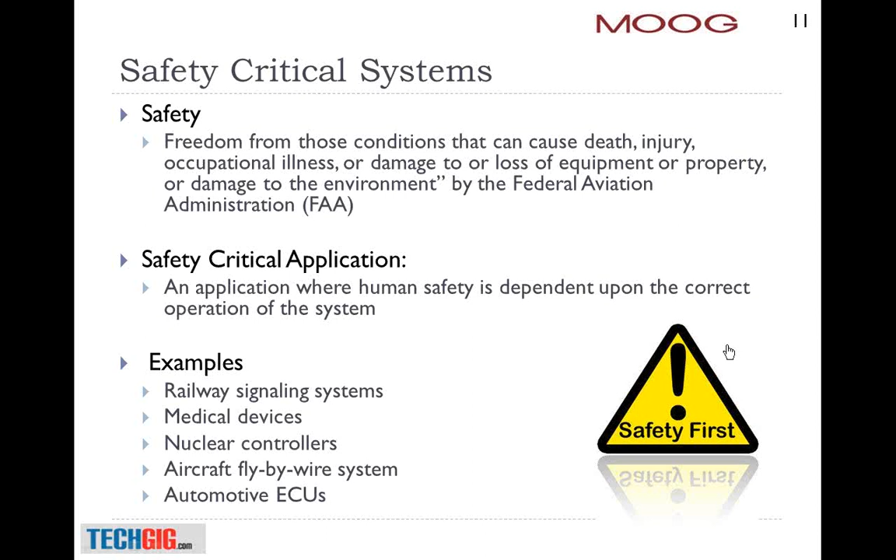So what you're seeing is a railway signaling system, just two people sitting there and controlling the complete railways. So this is driven by software, and it is a safety critical thing. The computer is trying to manage the tracks, and accidents have happened in this. This is something which is there inside the heart. Instead of the heart you have a small artificial pump which has software driving it. So this is the medical field.

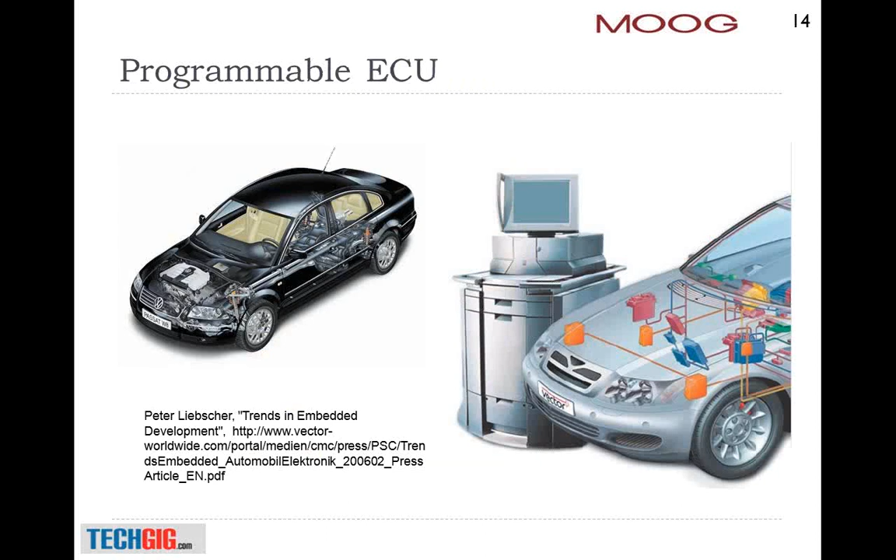Then you have the programmable ECUs. So your family is traveling in a car, completely dependent upon the software that is running the show. And then finally you have the fly-by-wire control systems, where again it could be someone very close to you who is flying in these things, and the software is driving this. The software makes it fly for 16 to 20 hours. You go from India to US, the whole journey is done by these fly-by-wire control systems.

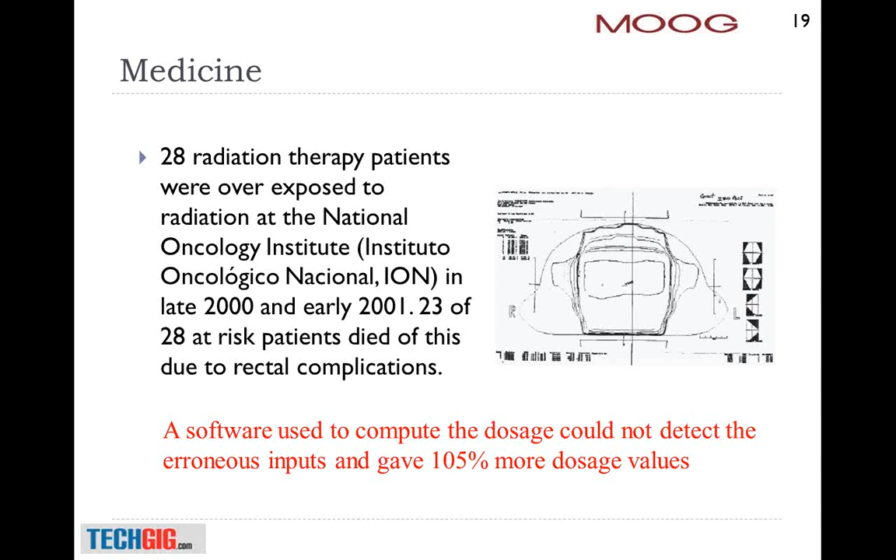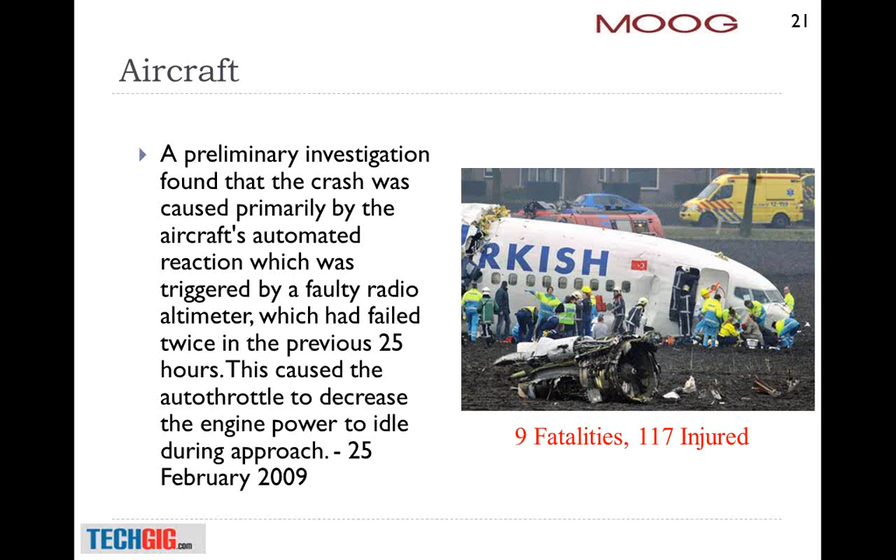And then the favorite thing for me, the aircraft field, where crashes have happened because of software failure. And all these things are pretty new. In hindsight, when we look at all these accidents, if we had done some extensive testing, perhaps we could have avoided this. So we require all our wits and ingenuity to make a safety critical system work. Outthinking nature is an overwhelming task. So this is what drives the safety critical business today.

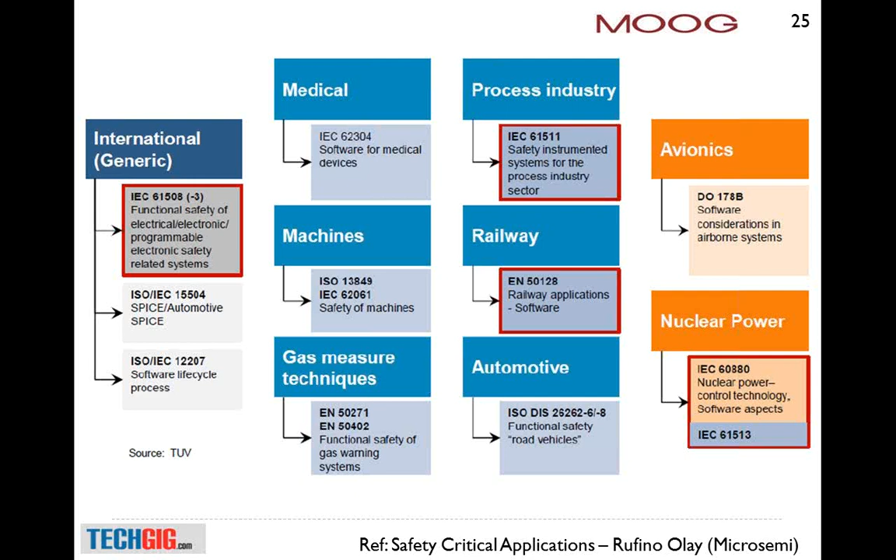So what do we have for this? We have standards. We require standards to develop a safety critical product. And what are the different standards available? You have got standards in all the domains. So you have the medical field with the 62304, the automotive domain with the 26262, the railways with the 50128, and the avionics with the DO-178B. So you have all the standards in place. So we have done a good job there.

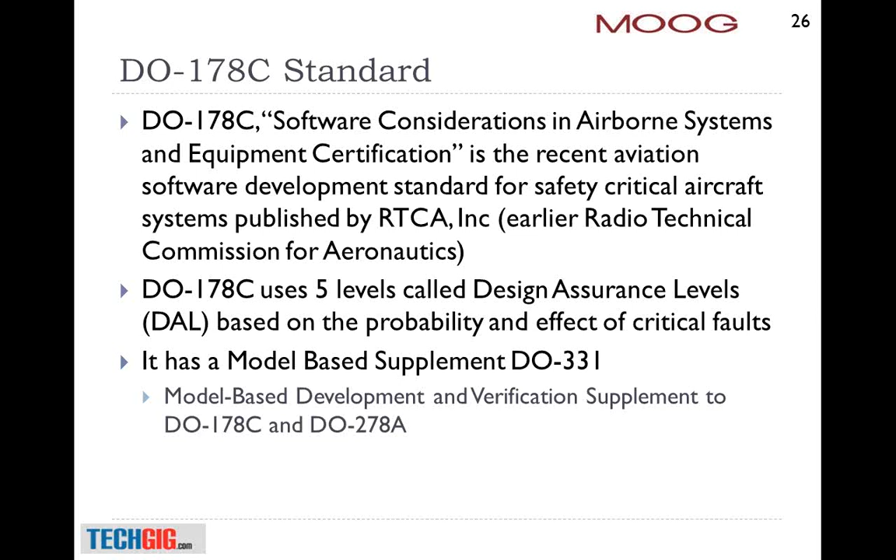The DO-178C standard, because I'm coming from an aerospace background, is our Bible which we read every day, sort of. This standard tells you that there are 5 basic levels of criticality, and how we have to test based on the criticality. And recently, the new standard DO-178C has a model-based supplement which talks about how you do testing and how you develop a system if you have requirements given as models. So this standard has realized that going forward, model-based is the way to do things.

So remember that there is a big difference between safety and reliability. A highly reliable boiler which can withstand 2 times the pressure may explode with twice the force in an unsafe condition. So you have to remember this specific aspect. Safety is different, reliability is entirely different.

The software will perform very well as it has been designed and tested for this. It will very faithfully carry out the function defined by the requirement. So we have to ensure that the requirement is safe under all conditions. So requirement is what drives your safety.

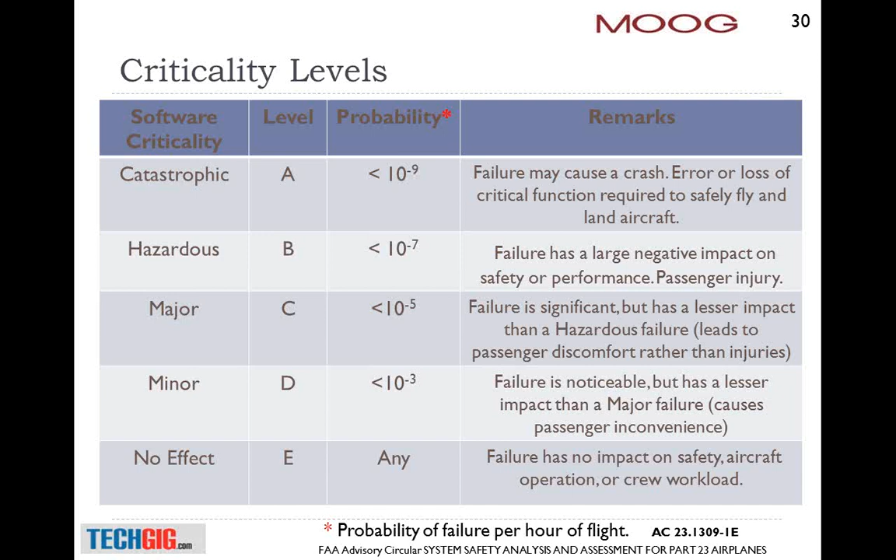These are basically the criticality levels in the DO-178C. So you have the software criticality, catastrophic; these are talking about the accidents. And what should be the probability of failure? So 10 power minus 9 failures in 1 hour of operation is a software with catastrophic criticality. So this is what should happen. And 10 power minus 9 is a very small number in 1 hour of your flight or 1 hour of operation. And that is designated as level A for DO-178C.

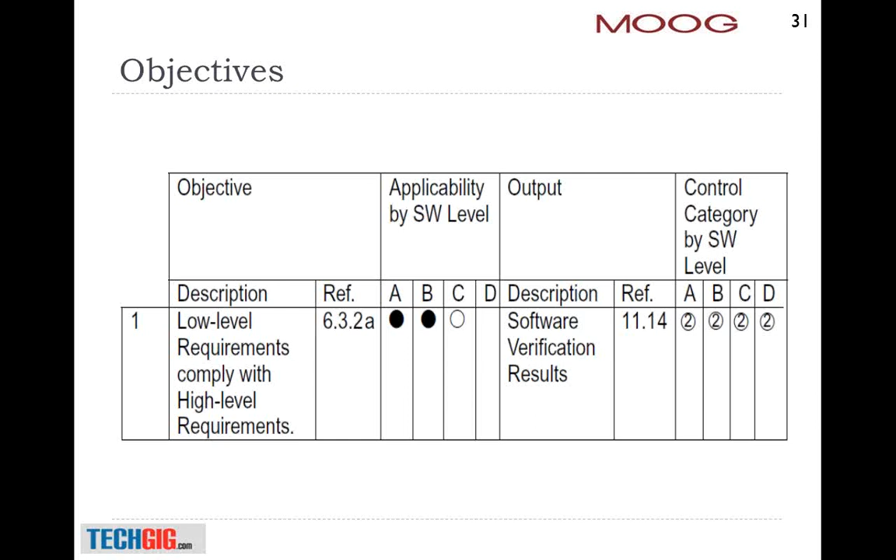And 178C lays down certain objectives. So it says that you have to fulfill these objectives to come up with a better system. So one of the objectives could be low-level requirements have to comply with high-level requirements. So there are a set of objectives categorized over the different life cycle phases. So you have planning, you have development, verification. If you see here, planning and development have 7 each, whereas verification has 43 for level A in DO-178C. And there is something called independence there.

If you see, for level A, 25 objectives have to be looked at with independence. What do you mean by independence? Independence means that if I am writing the requirement or I am writing a piece of code, then there should be somebody else who has to review it and ensure that what I have done is correct.

So that is independence. The essence of DO-178C is that every line of compiled code is directly traceable to a requirement and a test routine, and there is no extraneous, or outside code, and the proof of this should be generated on the actual system that flies. So that is very important, where you test it on the actual system that flies. That was about DO-178C, the standard for aerospace.

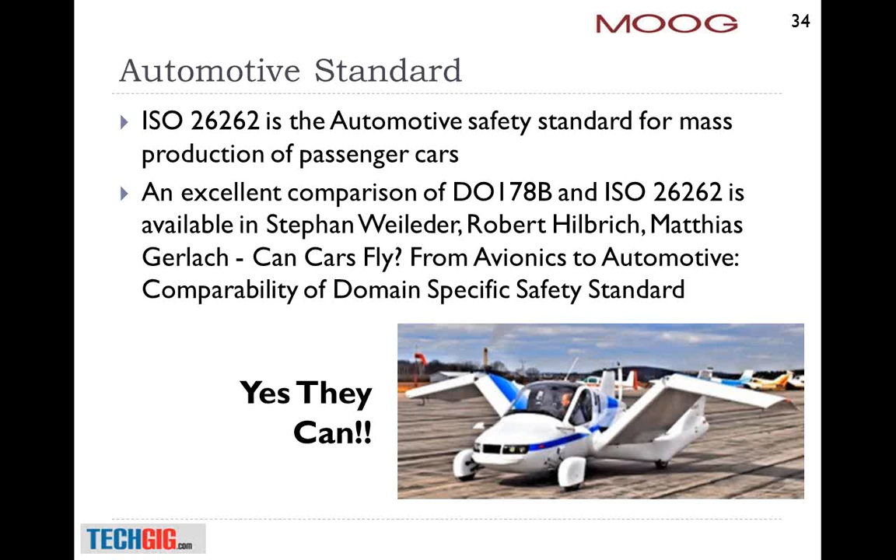In the automotive domain, you have ISO 26262. And a beautiful comparison is given in this particular paper. It's available in Google; if you search for it, you'll get it. A very well written paper which says can cars fly. And actually they can. There is a car which can actually fly. It is half aeroplane and half car. But the standard is pretty much applicable.

Now, in DO-178C, you saw a lot of levels. Even in 26262 for automotive, you have different levels, which are, I think, classified in a better fashion than 178C, because you have classes for severity of an issue, classes of probability, and then controllability. This controllability is not there in 178C. And based on these things, you define your levels. So you define the ASIL levels based on the probability of occurrence and the severity of the accident. Level D is the most catastrophic; level A in 178C is level D here.

And if you see, 26262 recommends different ways of testing, which is not available in 178C. 178C doesn't say how you go about testing it, whereas 26262 says how to test it. And there is a back-to-back test where the responses of a test object are compared with the simulation model. So it is basically talking about model-based testing here.

When you do a comparison, you will see that there are a lot of commonalities. One thing is modified condition/decision coverage. This is basically talking about code coverage, where both standards talk about the same thing. And it is mandatory for level A, and it is also mandatory for 26262.

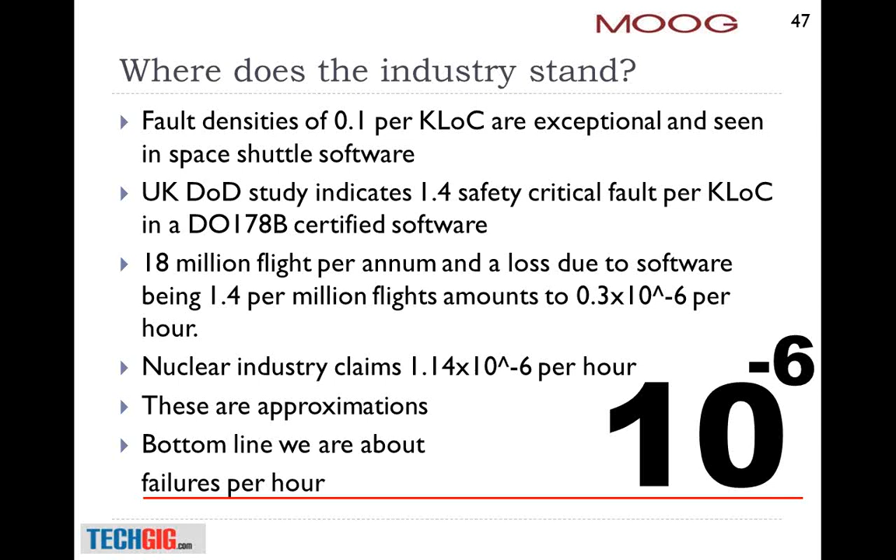So what are we finally saying? We were making a system with 10 power minus 9, but what we have ended up with today is 10 power minus 6 only. So we have a long way to go. And why is this happening? This is happening because of the way software fails: you have an error somewhere, in the software boundary. There is something wrong in the code you have written, and unless you exercise that, it remains there. But the time you exercise it, it results in a fault at the software boundary.

This fault may or may not result in a failure at a system boundary, and at the aircraft level boundary. So that error may remain dormant like a volcano for a very long duration, but the resulting eruption can be catastrophic. I have experienced this. We have had errors in our flight programs, and easily we could have lost an aircraft if this error was not trapped during the testing. So we should understand the behavior of the control system or the algorithm, which is very important.

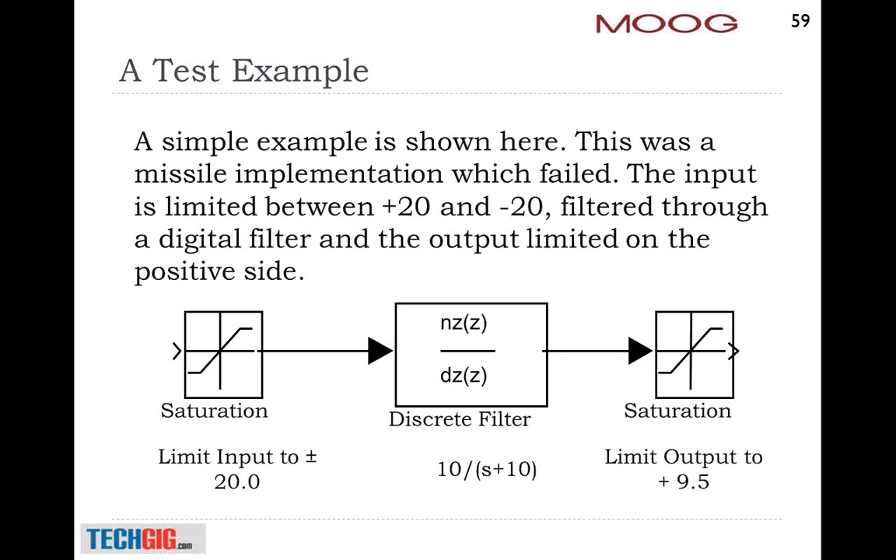So the input and the model both were excited by zeros. 0 is a very good input to test, and output was 0. No issues about that. So output was matching between the model and the code perfectly. So there was no issues in this. Now, is it sufficient for a safety critical system to be tested in this manner? So we said, okay, let us do some dynamic tests also.

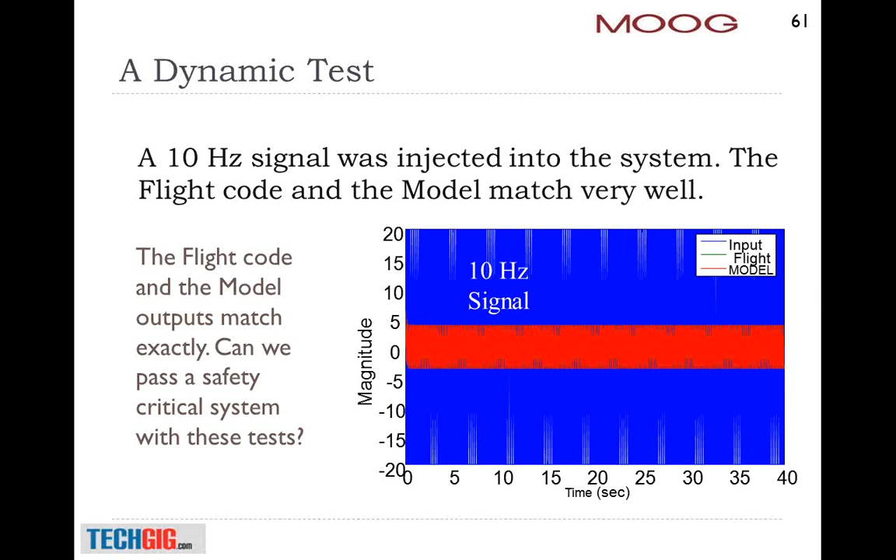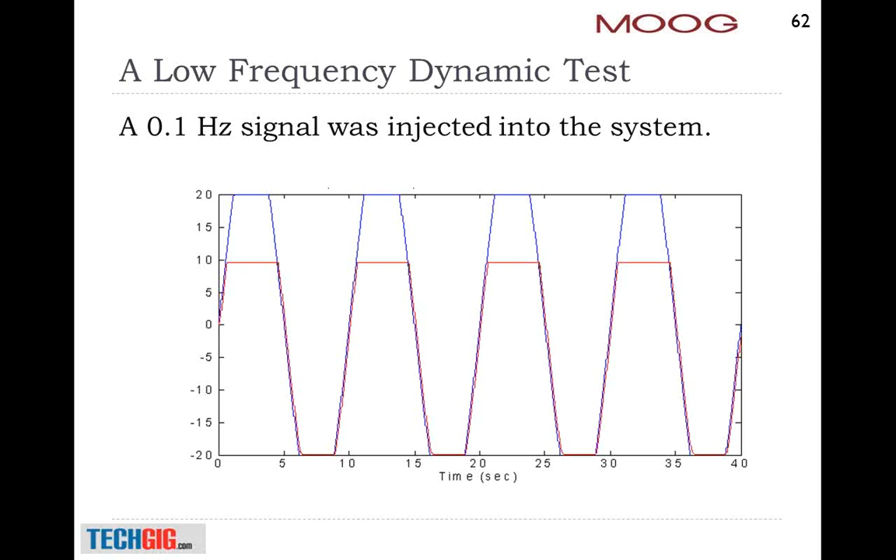So we ran a sinusoidal waveform with 10 Hertz. We ran through this, and it was matching. The code and model was matching. We said, okay, it's something wrong. Something is not right. So let us run a small 0.1 Hertz signal waveform, do it very slowly this time, and then we realized that the output of the code and the model was not matching. And we had a small error.

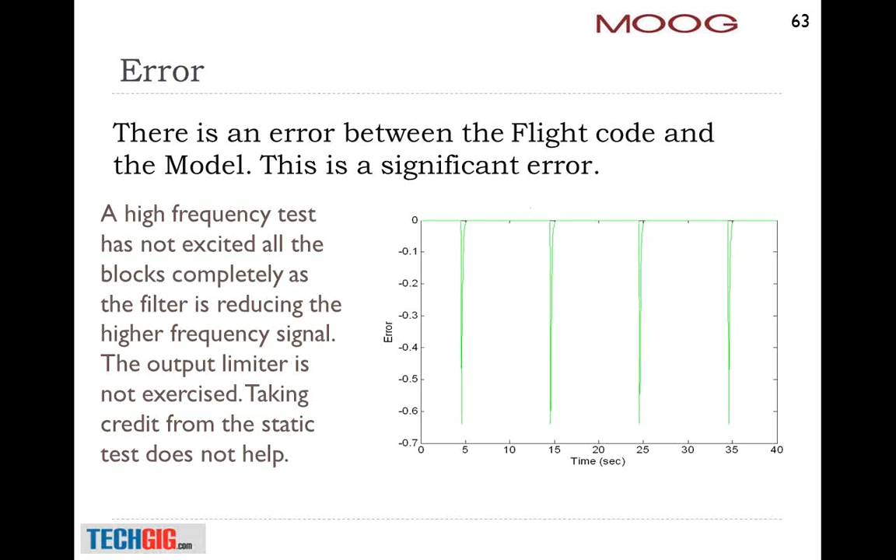So if you see this plot, this error is very small, minus 0.6 or something, a very small error which we could say is insignificant. But this was actually a major error where the same variable was reused, and because of this, the missile shattered. It just broke apart. Nobody got hurt, but this is what happened. So what is important is that you have to have test cases that test the systems.

So the test case that you do should be testing your system rather than just the code. So the test case design is very important here. So you should spend some time, better spend a lot of time, thinking through how you are going to test the system, not just the software alone.

A frame-by-frame comparison with a model is a very powerful way of testing dynamic behavior of the system. The model is a system requirement, so it is a direct requirement-based testing. That is the way you should be testing any system. So if you do a frame by frame, every frame I do a comparison and say my model and this matches, I'm very good.

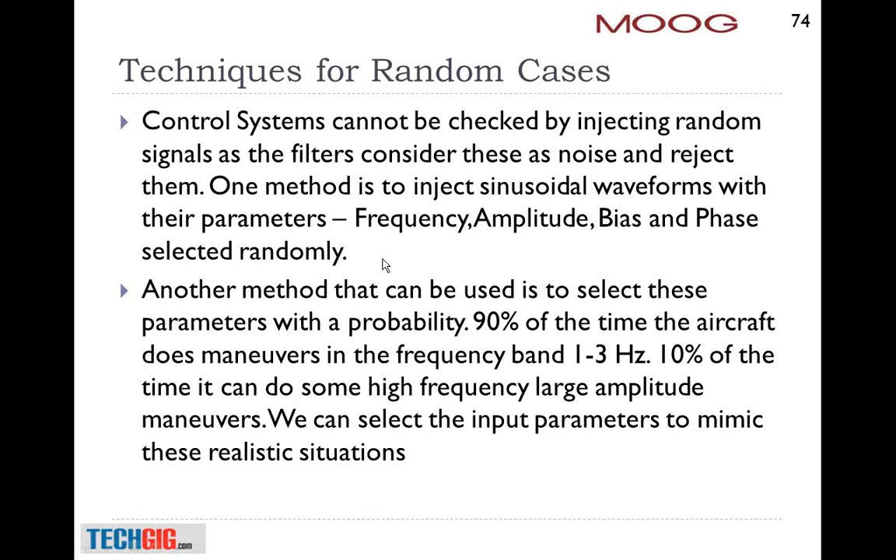So we said, okay, we will just generate test cases with a lower frequency most of the time, and we'll have additional test cases with higher frequencies. So things like that. If you have a lot of data, you can think of simple techniques to come up with some realistic numbers. Let me talk about coverage metrics.

So when I say that I generate a random test, it's not just that I generate waveforms and inject them. I have to look at coverage. One thing is I have to look at code coverage. There are ready-made tools available which instrument the code and give you a coverage metric for that. But you are required to do your model coverage also, the requirements coverage also.

So what we have done is we have come up with our own metrics for our control system. So you may have to come up with certain metrics which are very specific to your application and say when do I say whether I have covered my system requirement or not.

So a little bit of skillful programming on your part can come up with very simple tools, very tailor-made for your specific requirement, and it is worthwhile spending some time at the beginning of the project to have these tool sets ready, and it will go a very long way. So this is what we have seen: with one week of effort, we have generated tools which have been used throughout.

So the test cases should cover the system requirement. I keep repeating this, that you should not only look at code coverage but at system coverage also. The system requirement should be completely covered. Code and model coverage are good metrics, but they don't indicate a functional coverage. So always look for some functional coverage and come up with your metrics which say that there is a functional coverage.